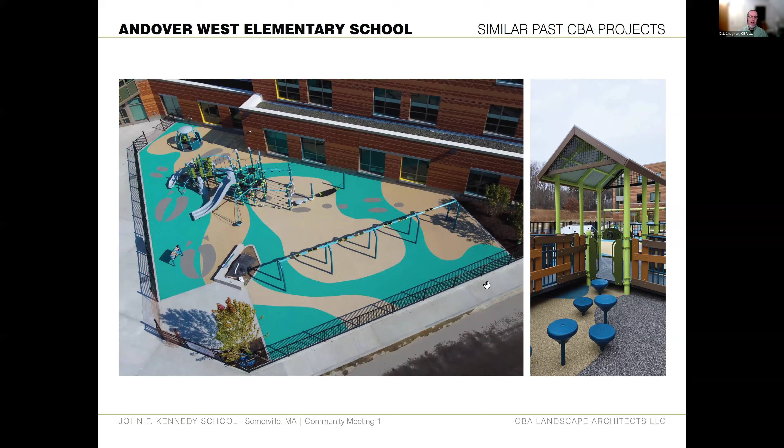Another recent one that might be familiar to some folks in the audience, we recently worked on the renovations to the West Somerville neighborhood school with the city, and we're really proud to design and work on that. Our Somerville roots go deep. We created some great new play spaces over there that I think people have been very pleased by, and we're hoping we can pull off the same for the Kennedy and get that kind of success.

And then passing it back to John a little bit to talk about other schoolyards work the city has been doing. Yes, so this picture showcases one of our most recent playground projects that we completed over at the Healey. And this just showcases the level of design that we're putting into all of our schoolyards.

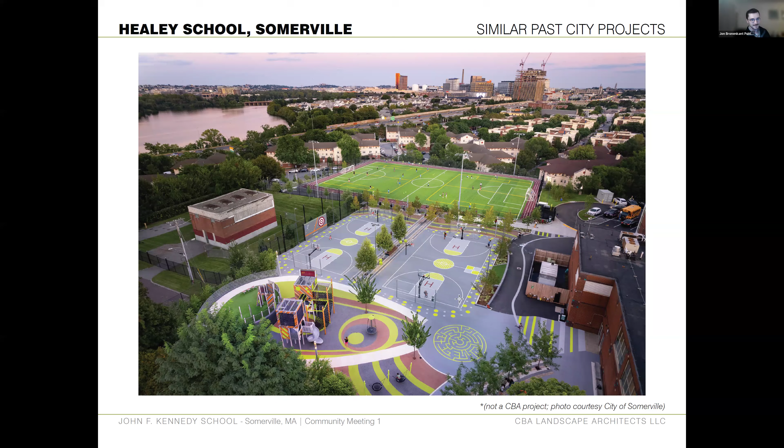So just a little bit of history about the school itself. The Kennedy School was originally constructed in the 60s and then renovated to the form we see now in 1997. That same year, 1997, was when the basketball courts were also built, meaning this playground has been in its current shape for the last 28 years.

In the back of the Kennedy School in 2015, we renovated the pre-K to grade 2 playground, actually with CBA Landscape Architects - that was us. That turned out to be a very wonderful project in the back area. So this front area is in due need of renovations now.

So in 2019, the CPA awarded the city funds to begin the design of the Kennedy School. At that time, the pandemic came out, and the funding that the CPA awarded was insufficient for the work that needed to be done. So later, we requested additional funds and contracted with our landscape architect, CBA LA.

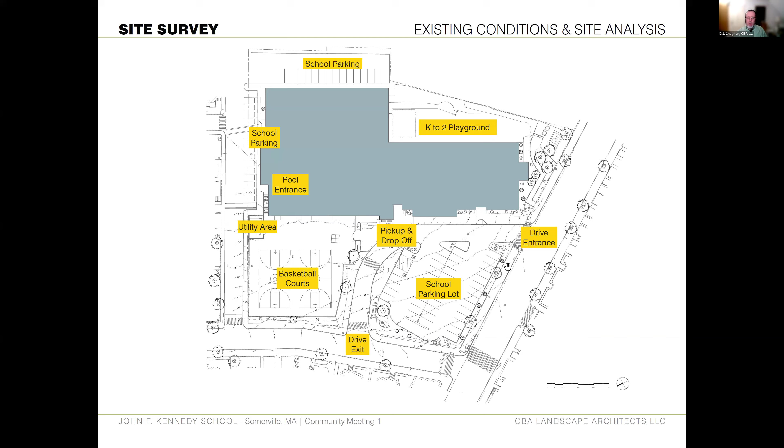You don't see the entrance to the school. The sight line goes in at a blank wall. Looking up from Elm Street, you're looking at the end of a blank wall and past the school—there's not a real sense of arrival.

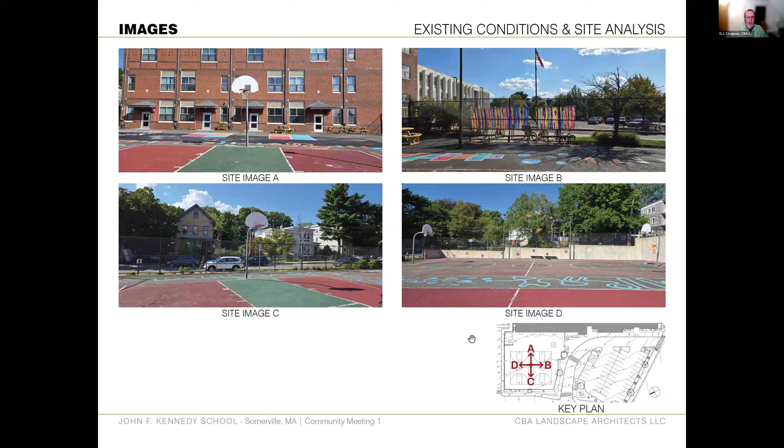The play area—I think everyone has a pretty good sense of this—is a look around in 4 directions: up the basketball courts towards the school building, out towards the parking lot, out towards the other side on Sartwell, and out towards Cherry Street. It's a big, empty expanse of asphalt with a 10-foot high fence and a pretty inhospitable character, no shade, very little tree canopy, etc.

Looking at some other images, there's that sense of walking up the sidewalk in this bottom right image, and you can't even see the entry to the school because of where you're arriving. The classrooms spill out directly into the play area with very little else. The basketball courts are big, open, and well used.

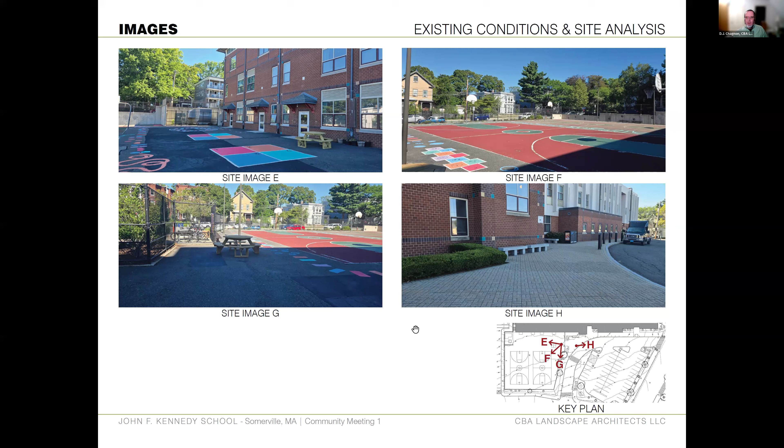There's a little bit of site furniture, picnic tables, and so forth scattered around the space. But really, one of the big issues that comes up is circulation and access. As I mentioned, you've got the vehicular circulation, and the pedestrian paths kind of cross it willy-nilly, trying to get to spaces.

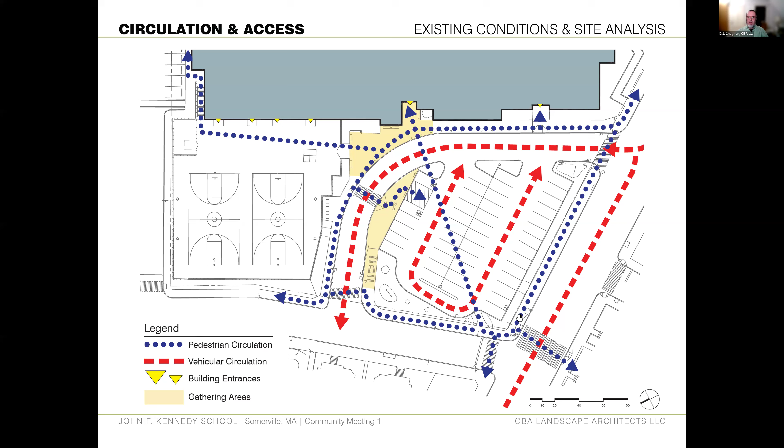Pick up and drop off kind of congregates in two halves on different sides - that's what those pale yellow areas indicate. There's not great sightlines, and there's a desire line to go through the space outside of school hours. So we really want to try to resolve some of that as we work through it.

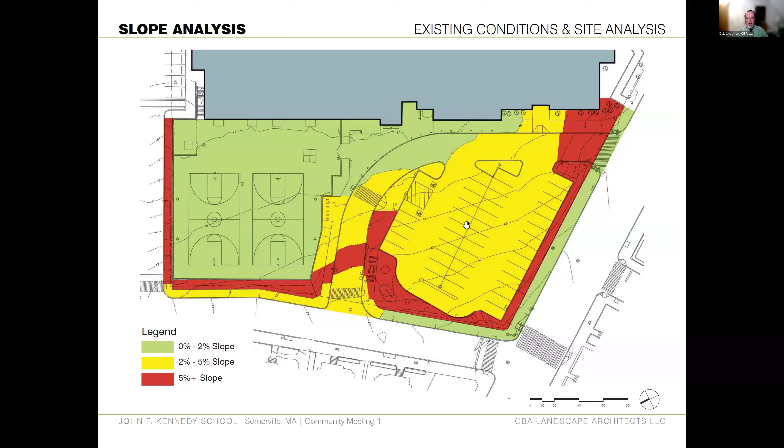Quickly looking at the site reconfiguration, the primary focus is expanding the playground space and streamlining the drop-off and parking, so we can meet that generational opportunity to create the playground that this space, the students, and the neighborhood need, as well as meeting the other logistical needs, clarifying those traffic patterns, creating safer pedestrian crossings, and better visibility and pedestrian access to give a sense of arrival and entry that prioritizes pedestrians.

Expanding the bike parking - the bike racks are currently overloaded, so we need to provide more bike parking, while minimizing the parking impact on the school, keeping all those things in mind.

The city and CBA have done a quick study of how parking compares at the different schools. The Kennedy currently has the highest parking-to-student ratio of any school in the city. Most of the others have a lower ratio, not even counting ones like the Winter Hill, where the parking went away entirely.

That gives a quick sense of it. Right now there are 73 total parking spaces at the school - 43 in the front lot, and 30 around the back edge.

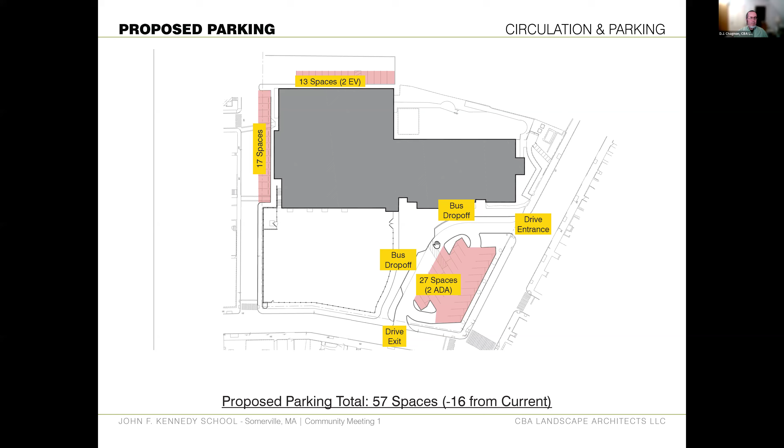So looking at that, we'll start talking about the rest of the site - that expanded playground area and the entry experience, and what those program possibilities are. We still want to include, because we've heard it from everyone, some hardcourt sports, possibly striped for multiple sports, and other types of play.

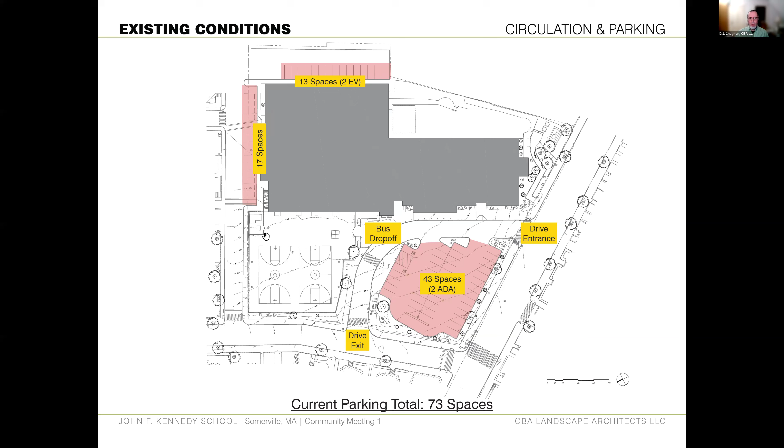We're going to end up with some blacktop. I want to skim back to the utility area over here—we need to maintain vehicular access to it. It also serves as the fire access for the building for fire safety, so there's a clear zone from the building out to about where the wall is, and the utility area that needs to stay clear. So we know we've got some asphalt area.

We want to include green infrastructure to make the space more sustainable, so that instead of everything just going into the storm drain, it can recharge. We did that at Cremin Playground over in East Somerville by McGrath. This is a great example of the kind of green space with permeable pavers, trees, shade, and so forth that a schoolyard can transform into.

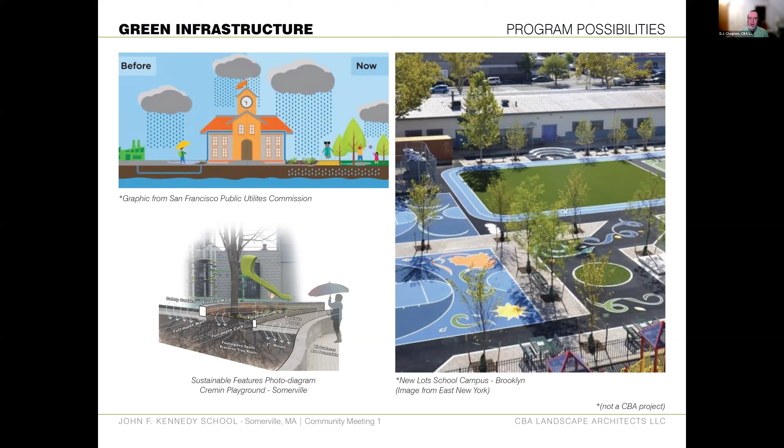On the right, we want to include play equipment, and there's a whole variety of styles, from traditional post and platform, spinners, larger group dish swings, structures with sensory features built in like rolly slides, climbable net-type things that incorporate other elements, and so forth.

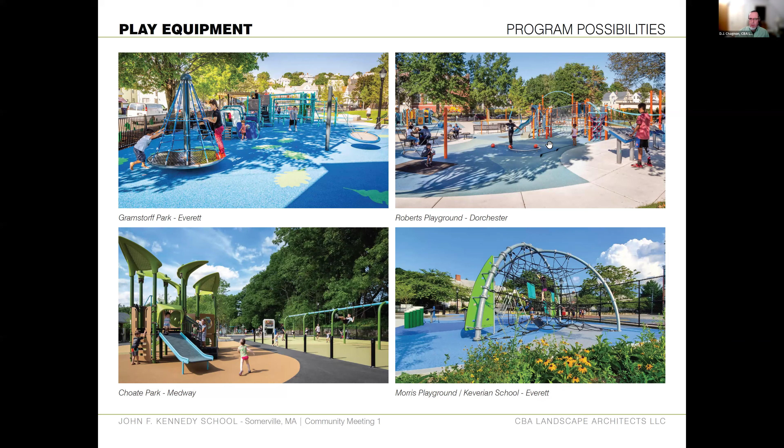Inclusive and open play equipment—this is hard to see from the photo, but it's actually accessed from one level into the play structure from above or from the ground below, with different sorts of features. We'll talk more about play equipment in a future meeting.

There are also particular inclusive play features we want to target, whether that's a wheelchair accessible glider that someone can roll right onto and participate in. It's kind of like a swing, not quite as dynamic, but true wheelchair swings are only for therapeutic settings.

They aren't really legally allowed for safety reasons because they're so big and heavy—there's potential for injury if misused. So they're not for public park settings, but this glider swing bridges that gap and creates a really great play experience. This is from a recent inclusive schoolyard up in Medford, the McGlynn Elementary, which we've been studying as one of our more impressive recent models.

There are spinners that are supportive enough to really help kids with mobility and upper body strength issues, that are also great for everybody. Picture exchange communication boards, wheelchair accessible spinners, maybe ramping on the structure or maybe not—that sort of inclusive play elements.

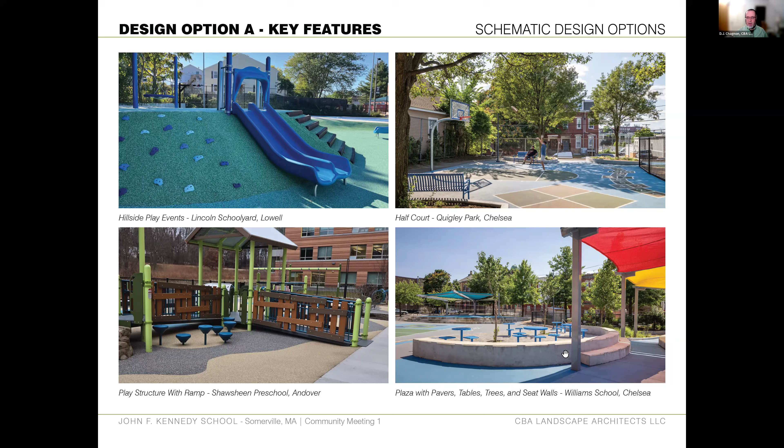Moving on to a second option with a different aesthetic. This one incorporates a full-size middle school basketball court. It's a little smaller than a high school court, but works well for the age group we're working with.

We're exploring whether people like the idea of extending out that wall to provide a better space for wall ball. If that's a priority, this could become two half courts instead, if that's something people are comfortable with, to free up more space for the wall ball, or it could stay as is.

A different approach with four square and nine square, which I don't know how popular that is currently, but it's definitely an interesting variation. A little obstacle course with run, jump, walk, and longer hopscotches, that kind of thing.

In this one, the play equipment is central with a looping path that goes around it, as well as a separate play area that could create a quieter nook for some of the sensory play features, a place of refuge, that kind of thing.

It's an opportunity, if it's a community priority, to include some preschool age equipment for the evenings and weekends. Really the play equipment is focused in the middle, with a quieter seating area with different stepped forms for seating on permeable paving, and then a shade structure, possibly with a labyrinth under it, or something else.

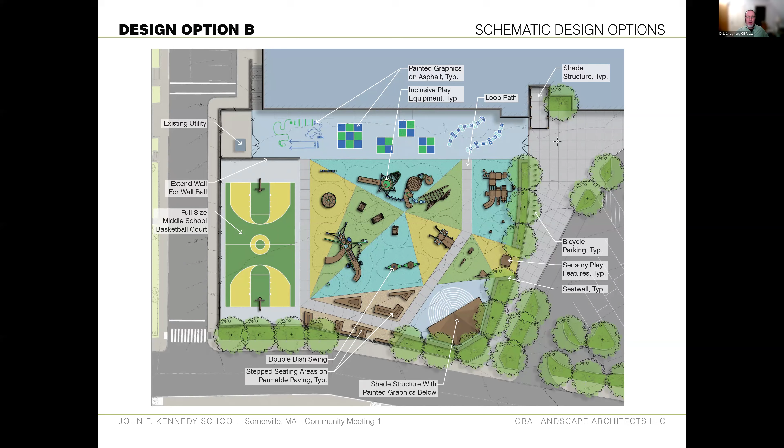So again, this is the new shade structure that went into the Capuano, with the labyrinth in front of it, sort of an idea of what playground graphics can feel like.

This stepped seating area is a possible model, although we'd be sure to have spaces within it so that it's fully accessible and anyone can get in and fully participate in the space. Wall ball.

It's popular now, and will probably continue to be popular, so we'd love to give it a designated space so kids aren't playing wall ball against the windows of the school.

An image from the recent renovation at West Somerville shows some of the possible types of play elements — both a play space and a place of refuge if a kid needs a quieter sense of enclosure — plus different play experiences that were really successful there, with the taller play structure shown in the background.

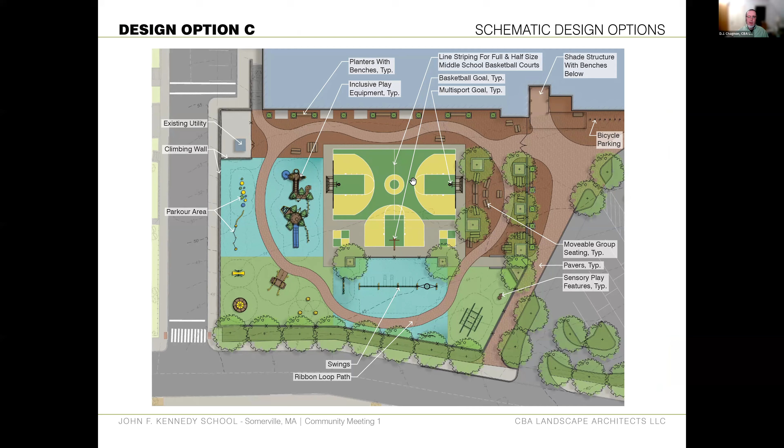The third and final scheme sort of inverts the previous one. Instead of play equipment being central, it creates a larger sports court area as the central feature, with space for a full basketball court plus an extra key, which could have multi-sport goals in case kids want to play soccer or something.

Around it are play equipment, a parkour area possibly taking advantage of the height of the wall to create a climbing wall over the rubber surface, inclusive play features, a bank of swings, and some sensory play items in the bottom right corner.

Just as you're entering the space, carved through by a walking path, there's an area of seating — this one shows a mix of seat walls plus some movable group seating that could be reconfigured and rearranged.

Tables and chairs, like shown in the bottom right, fit 3 adults or 2 adults depending on the size of the table — heavy enough that they won't walk away, but lightweight enough to be reconfigured.

You could get 4 middle schoolers on one of these, pick it up, move it around, put them together to make a picnic table, or set them up side by side to create areas of table, bench, and desk in case a classroom wanted to rearrange and do a lesson out there.

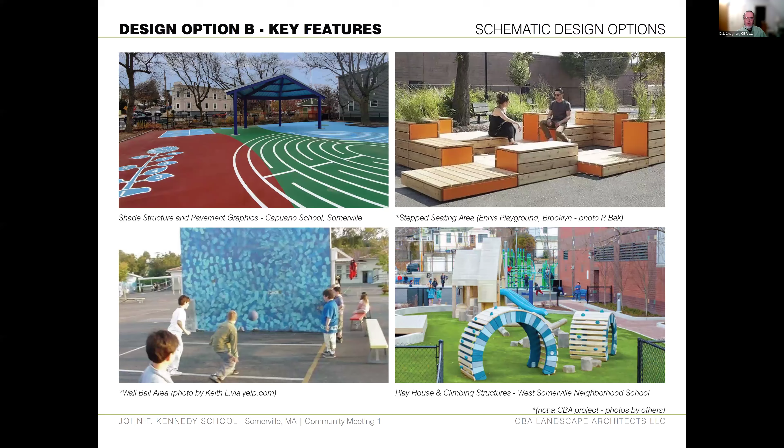I think also to the rest of Christine's question about what drove the arrangement - there's a minimum safe distance that the exit onto Cherry Street can really be from the corner, even though there aren't people exiting all the time. So it becomes difficult to push this any further that way if we were trying to maximize even more. It would also cause the playground to bulge out and cut that sight line off again.

Also, we're going downhill on Cherry, so the further we go downhill, the steeper the slope coming in is from the street. So it was really a combination of factors.

Since Christine is muted or unmutable at the moment, she had posted a question in the chat about the current basketball court design creating a great deal of storm runoff onto the grassy area and out onto Cherry and the sidewalk. And yes, absolutely, that sort of drainage issue is something we will be addressing and fixing over the course of the project, whatever the design ends up in that corner.

That runoff has been driving me crazy for nine years. It's been terrible. Yes, the freezing issues and then the pooling by the staircase is definitely an issue that we can easily fix in this project.

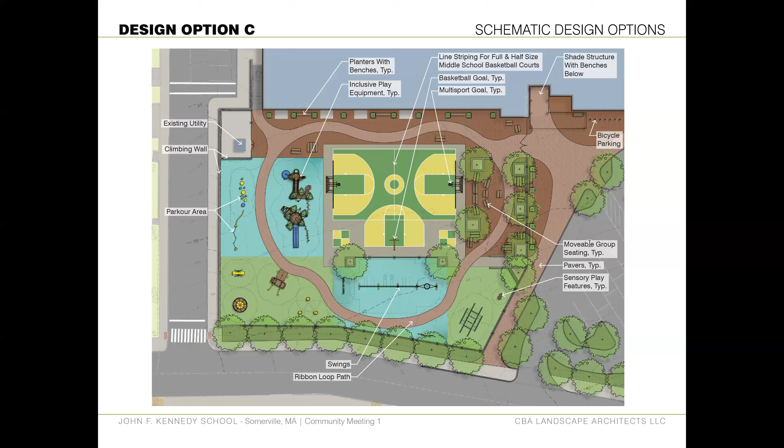I think, DJ, you can see in this plan if you could just highlight the bus drop-offs - there are kind of opportunities for both the bus drop-off, and then there's an additional pull-in area.

Those spaces can maybe become accessible spaces or some other form of quick drop-off for parents who need to drop off their child with a mobility disability, and then be able to park their car somewhere else. But it's about giving these relief spaces for people to park the bus, van, or car, and get out safely onto the play space.

We do have parents who have children here where the parent is the one who uses the wheelchair. The parking spaces themselves are nominally teacher-only parking, although some of it happens on the drop-off loop currently. There's also a secondary entrance to the school halfway up the drive from Elm Street, with drop-off space right next to it for a short distance into the school.

Thank you very much. You definitely want to level out the area from the entrance to the accessible spaces to make that as non-fatiguing an entry experience as possible for everybody. Thank you very much, appreciate it.

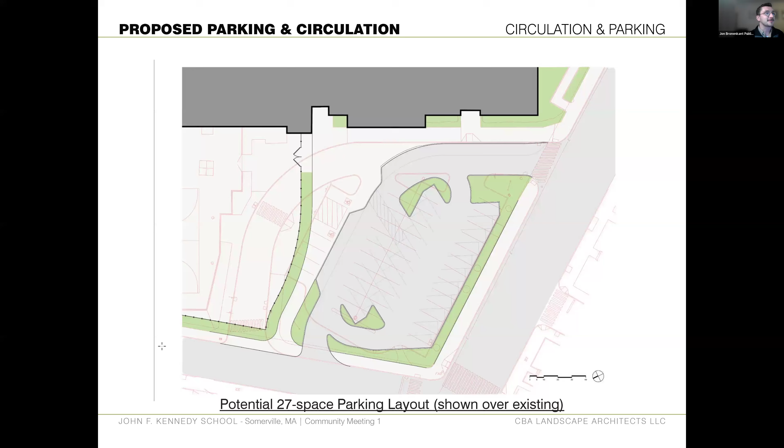Catherine, you should be able to unmute yourself. Yeah, if you can hear me. Yes. Thank you guys. Oh no, I'm so sorry, I pressed mute. Give me one second, I pressed the wrong button. Does that work? Perfect. Yes, it does. So sorry about that. Awesome, thank you guys so much.

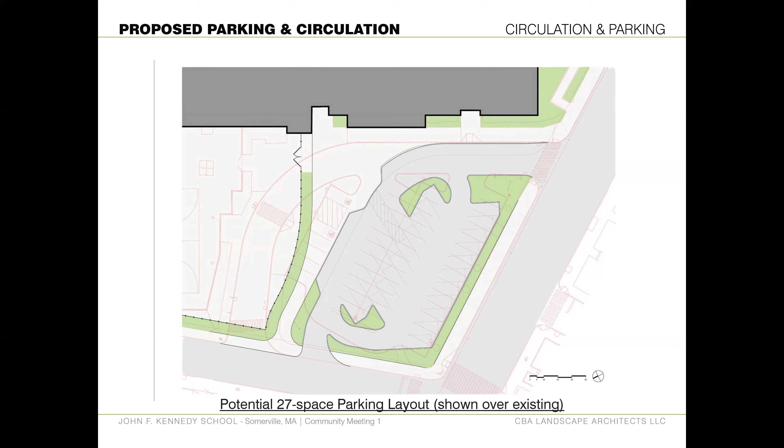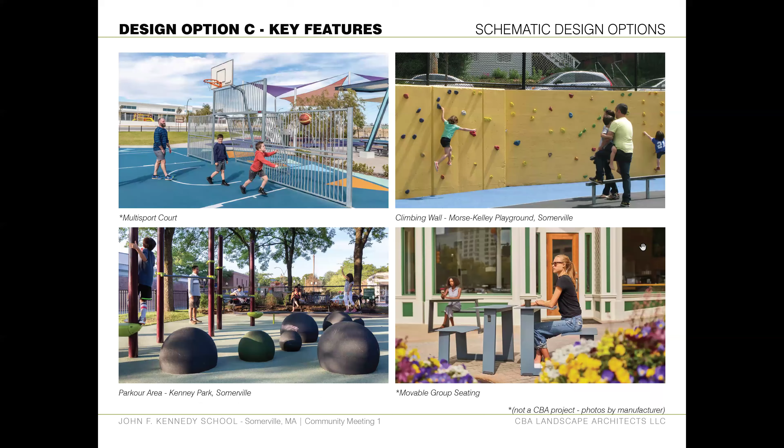It's so exciting to see these different options, thank you for walking us through them. I wanted to express enthusiasm about the greenscaping, the reduction of parking, and creating more open space for open-ended play. I did want to encourage looking at further options for low-maintenance, open-ended, nature-based play at other parks in Somerville and Cambridge. I think they've done a good job creating spaces with water access—not necessarily like a splash pad or spray deck, but those little pump systems they have at Hoyt Sullivan, Hodgkin, and Curtin Park. Even at Sacramento Field, they have one where the water is off most of the time, but there are log-looking basins that create space for open-ended play, so kids pretend to cook potions in them. We'd love to see and emphasize those types of open-ended, nature-based play systems.

One question I had: is it possible to look at more shade structures? Those trees around the perimeter will be really great in 20 or 30 years, but for a long time they'll be like baby birds, not super useful. Even with a reduction in asphalt and introduction of more natural materials, as a footnote, I'd love to say no turf please—we don't need the PFAS, we don't need the microplastics, I don't think we need this. It's still going to be really hot there. Is it possible to do temporary shade structures, or consider that?

And second, is there going to be room for residents to help choose the species of those trees, or is that completely in the purview of the city or the landscape architecture firm?

We would be happy to have some input on tree selection. We're looking at our Somerville Pollinator Action Plan that helps guide different tree species to achieve SPAP goals. We'll have to go to the Urban Forestry Committee to get approval for planting these trees—that's a public meeting where you could go and voice concerns about species we're proposing or make recommendations. We're also very welcome to hearing different plant options. I know there are some concerns about bees and wasps stinging children, so if you have experience with specific trees, happy to hear those concerns.

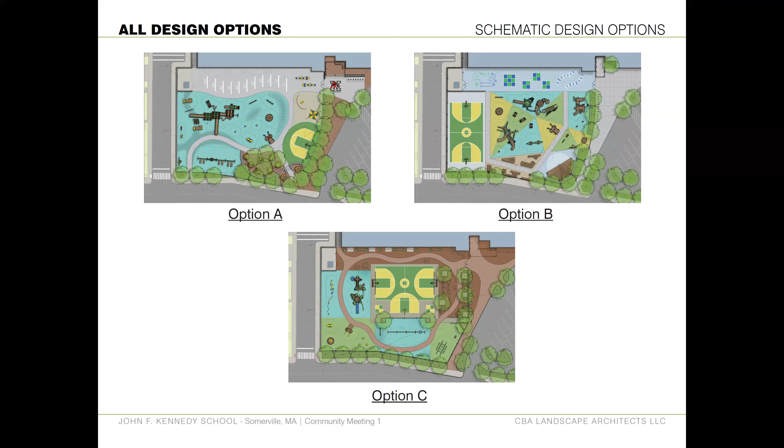Yes, happy to talk about this. I'll go into a little background on the finances. We've been building a lot of parks in the past few years, primarily because of three sources of revenue. ARPA funds gave us a lot of money to do a lot of projects over the past few years. That was kind of free money, with very few limitations on dedication of open space in perpetuity, and different restrictions on the type of things you can buy with the money. That gave us a lot of flexibility to do a lot of projects.

We also have our park grants, which provide up to $500,000 each year for different park projects. And then we have our CPA, or Community Preservation Act, that gives us a lot of money each year to fund our projects. We can't use two of those items on this project. One, ARPA's expired. Two, park grants and other types of grants aren't viable because we need to dedicate the parkland as open space in perpetuity if we accept those grants. With this being a schoolyard, we need to leave that space flexible for the school for future projects in 50, 100 years from now. So CPA is really our only route to funding this project.